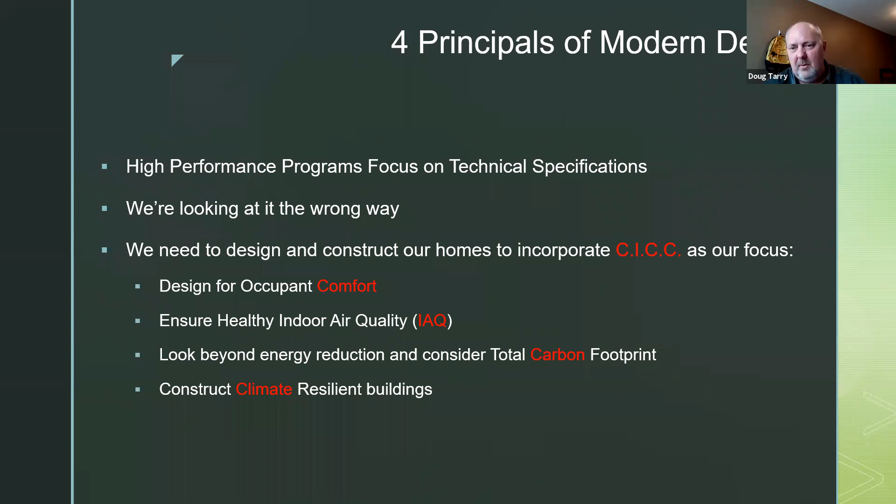So what is net zero and why should we care? This is assuming you know nothing about net zero. In simple terms, a net zero home creates as much energy as it uses over the course of the year.

Why should we care? Well, frankly, we've only got one planet. Earth is our one and only home. Our shared role should be in ensuring that it's safe and livable for our children's children. So my grandbaby and beyond.

And I'm a huge fan of Joe Strummer. I would have to say he once said in a song, hey, I hear what you're saying. If you're going after getting the honey, then don't go killing all the bees. And that's what we've got to try and avoid doing. We have to make sure that we're thinking long-term on this.

So in building our team for coming to net zero and what we're needing to do, you really got three core teams you need to look at. You've got your consultation team, and there you need an experienced energy advisor to lead you down the path and make sure that you're going in the right direction. You need to supplement that with a solar consultant, an HVAC designer, an installer, your window supplier, your building official, and your utility guy to make sure that you're able to cover this off.

The next team is your construction team, and you've got to engage your site supers early and frequently, as often as you can. They have to know what's expected performance-wise in the field, and they have to be able to troubleshoot. So it's really important that they understand what the goals of the program are. You also need to look at any trade that touches the envelope. They have to be included because they can wreck your day in a real hurry if they don't know.

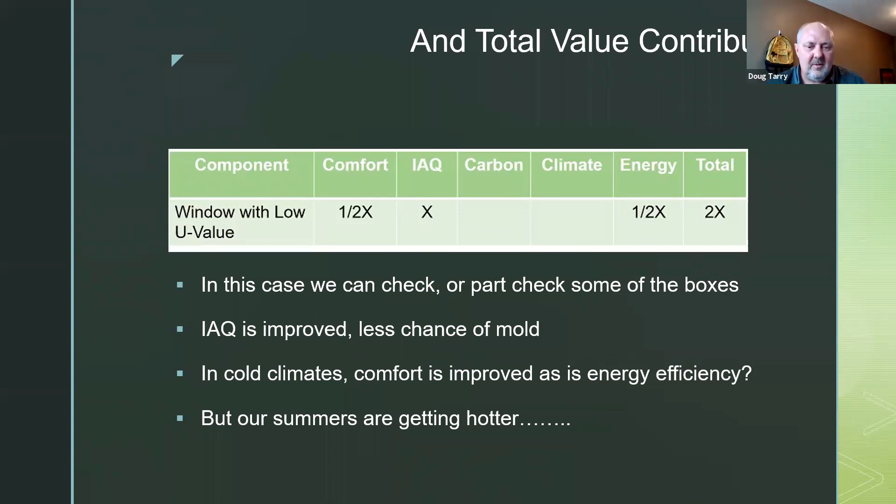And it's a little bit of an improvement on the energy piece as well, but it doesn't address summertime heat gain. So when we're looking at windows, we want to talk about low solar heat gain coefficient. My recommendation to any builder, pretty much anywhere that has sun, is get it under 0.3. Now, solar heat gain coefficient should be very available in the States.

In Canada, it took us quite a while to get that, but it's very much worth looking at. I've met with builders in the States as well that don't consider this, and they're going for the best wall that they can build, as opposed to the best wall system that they can build. The windows are an important part of that, and we'll get into that in one of the future sessions.

The challenge with not dealing with low solar glass is that you're going to blow up your energy loads on the cooling side. So if we're able to add low solar glass, it's going to reduce our AC sizing, which makes your ducts smaller. That's really important, especially if you're still putting them up in the attic. If your HVAC contractor doesn't understand the relationship between low solar glass and being able to put in smaller systems, the first thing you do is retrain your HVAC contractor. And if that doesn't work, find a different HVAC contractor.

It's that important. People will say, well, why would I spend more money on the windows? Here's the thing: let's say a $10,000 window package on a fairly small home costs you an extra $1,000 to go low solar glass. So it's going to add about 10 cents more per dollar, or 10% more. Will a customer pay $1,000 more on a $500,000 home? Well, they probably would if you explain it to them. But if you build it into the total value contribution of the home and it's not included as an extra, then after the fact it's, I just got this really great deal and oh my goodness, my home is really comfortable, which is kind of the goal.

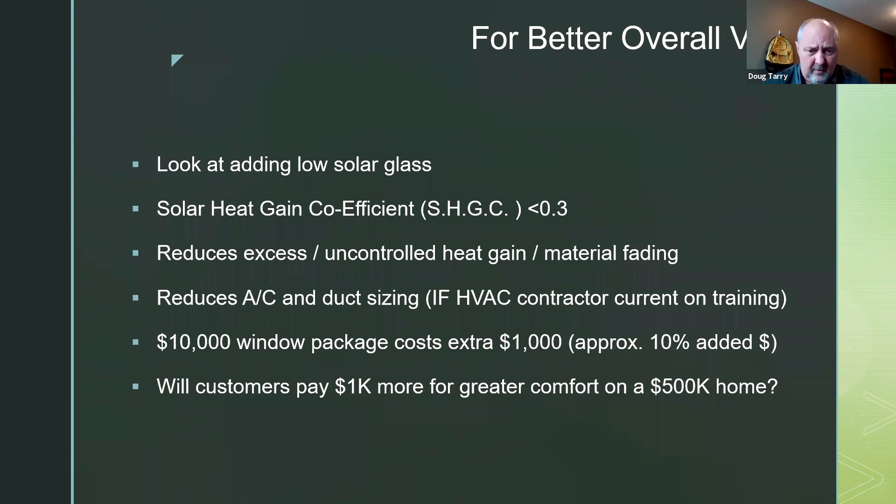So now we look at a comparison of going from regular triple glass to adding low solar glass. Now we've got greater comfort both seasons. We've improved indoor air quality year round because you get rid of that heat stuffiness that can happen in the summertime. We've improved our climate resiliency, and we've improved our carbon reduction because we're hammering away at reducing the heat gain that we can't control in the summertime, the intermittent load that's hitting right at the time that peak loading for your electrical grid is happening. And energy consumption is reduced as well. So we're able to do a lot of things for $1,000 more. That's why, in my mind, that's a better overall value contribution than just looking at less expensive glass.

What that doesn't factor in though, is that you're also going to save money on your air conditioning and your duct sizing, because your air conditioner can drop in size and your ducts get smaller. So you're using less materials. That's also another way of reducing your carbon footprint on this as well. So it's a win all the way around, and your customers really enjoy it.

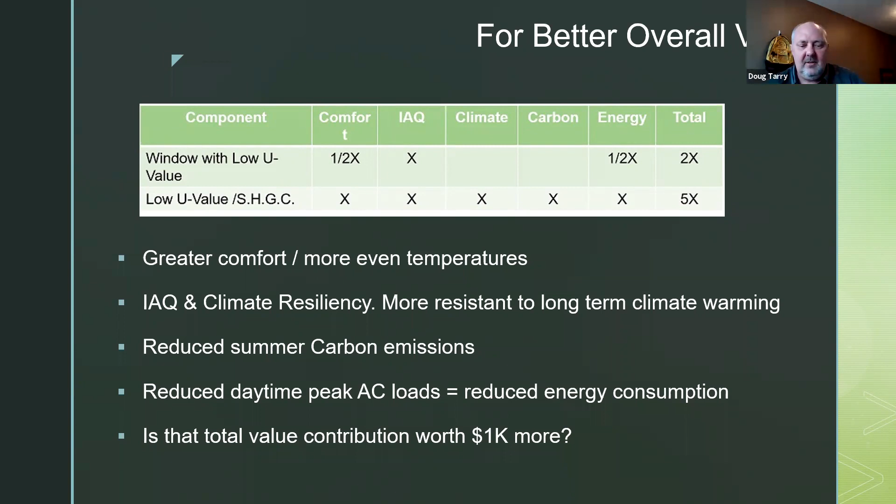The best way I've found for demonstrating this is get a nice sunny afternoon with the window glass right there, and have the customer put their hand right on the glass and say, "Isn't that cool that your glass is cool?" And they're just floored by that. Of course, they want to tell all their friends about it as well.

So the first couple pieces, Doug, quick question on that one: do you omit the low solar heat gain coefficient glass on the north side of the homes, since they may or may not be impacted, or do you do it across the whole package? I'm not that mean to my framers.

I do it across the board above grade, because we used to do spectrally selective glass. And the problem with that, Aaron, is then you've got to try and figure out, okay, which window is this 4x4 window, which wall is it supposed to go in? And it just makes it really difficult.

Now, where I am, I'm around 41.5, 42 latitude. When we're in July, August, the sun's actually a little bit north of us for a while, so there's still a benefit to putting it on the north side as well. And Gord Cooke would tell you too, it actually helps reduce radiant loss outward, so it helps keep the energy within the home. Great point, there's benefits all the way around.

The only spot where we don't do it is when we've got an exposed basement, where we think, okay, we might gain a little bit of heat warming into the basement. But I can see at some point down the road that we'll just do it on those windows as well. It's just less available right now for certain basement windows, but above grade, I would not try and separate it out. Yeah, perfect, thank you. The difference in cost, it's not worth it.

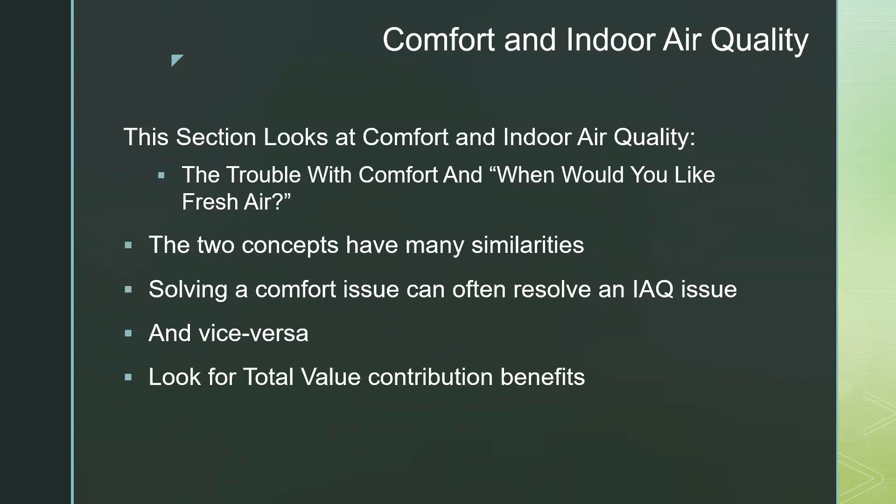All right, so here we're going to look at comfort and indoor air quality. And one thing I always like to talk about is the trouble with comfort is getting people to understand, when would you like to have fresh air? But those two concepts, they're similar, they overlap a lot, and sometimes solving a comfort issue can often resolve an indoor air quality issue, and vice versa. And again, we want to try and see that we're hitting total value contribution benefits.

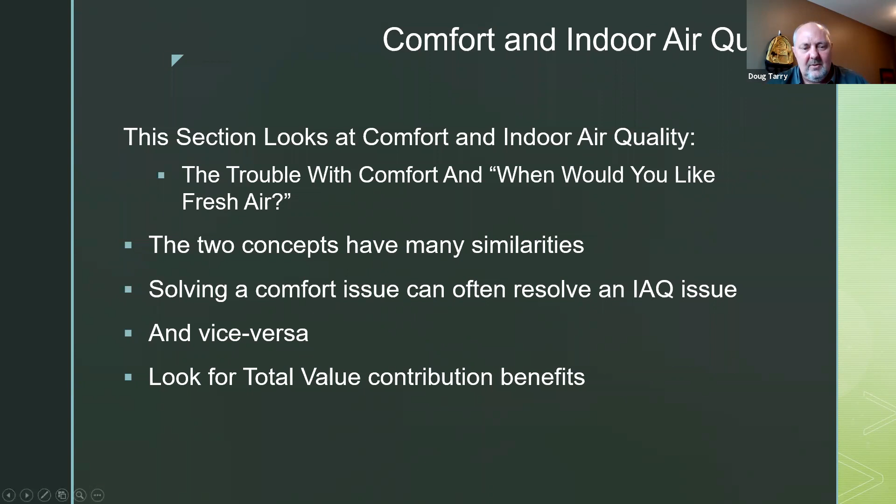But I like to talk about Goldilocks.

Now, Aaron, I don't mean it in the sense, I think she was on to something, but I don't mean the fact that she was a break-in and enter hooligan that had no regard for other people's property. Because when you think about it, really, Goldilocks wasn't a very nice person. And you kind of got to feel a little bit bad for Baby Bear, right? He had his home invaded, his breakfast eaten, his chair destroyed, and he found someone in his bed who then ran away on him right when he was wanting to play with her, right? So he thought, well, the one good thing I'm going to get out of this is at least I got somebody to play with, and she runs away. So clearly she had some serious entitlement issues. That's not what I'm talking about here today, but it's a pretty great story.

Right? What I'm talking about is the just right principle, or the middle path in decision making, which is actually known as the Goldilocks principle because of this. And so how do we as builders ever attempt to handle the question of occupant comfort when it's such a subjective feel to the occupant, right? And the answer is make Goldilocks happy. You want to hit for the middle, right? So that's what we want to try and do.

As far as comfort, in my personal experience, and part of the point of the guide is to share my horror stories and everything I've screwed up, I think I probably made almost every mistake possible on comfort. I do understand that clients' expectations rise with high performance homes. They expect more, right? It can kind of feel like a forlorn hope, where you feel like you're constantly chasing. You can't get the perfection, and you don't really even understand what perfection is.

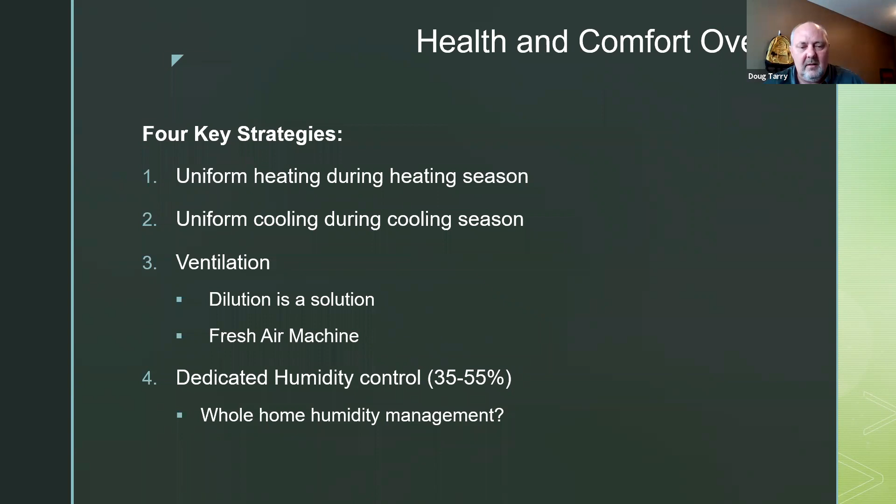Okay, so what is low-hanging fruit? Well, number 1 is rooms with a draft are a drag. We know that they're not comfortable to be in, especially in the wintertime. Rooms that have excess solar gain, that overheat and are not comfortable to be in. So, you've bought your house on the lake and you've got this great bank of windows facing the lake and it's facing west, and you can't be in those rooms because you're blown away by the amount of heat. That's probably not really prudent for comfort, right?

That cold basement floor, it's amazing because a lot of folks say, well, you've got to go with in-floor heating to fix that. And, really, about an R10 of foam underneath that floor and allowing the concrete to be thermal mass within the home will take you about 95% of the way there. And I've constantly got customers saying to us, wow, I can't believe how comfortable my basement is. And it doesn't have in-floor heating, which is the Cadillac. I've got it in my own home, but we don't build with that as a standard.

The other thing is thermostat location actually becomes extremely important. We really want to avoid letting the decor consultant put their hands on it whatsoever. So, if it's got to be in a certain spot to really make sure that the home works well, don't let them move it so they can put a picture there sometime in the future. It's not really fair to the customer in the long run. So we want to control air leakage, especially where people sit.

We can look at zoning as an option, but I've found that if you start with looking at low solar heat gain windows, zoning becomes less of an issue because you have less of a challenge with that. But that also assumes that you're looking at mechanical systems that are modulating, right? Single stage systems. When I actually got ECM motors put into the Ontario building code for mechanical systems, I neglected to clarify that it should be modulating. So then they brought in single stage ECM motors, or direct current, you could say, which doesn't really help with what we're trying to do, which is reduce stratification by having blended air on a continuous basis.

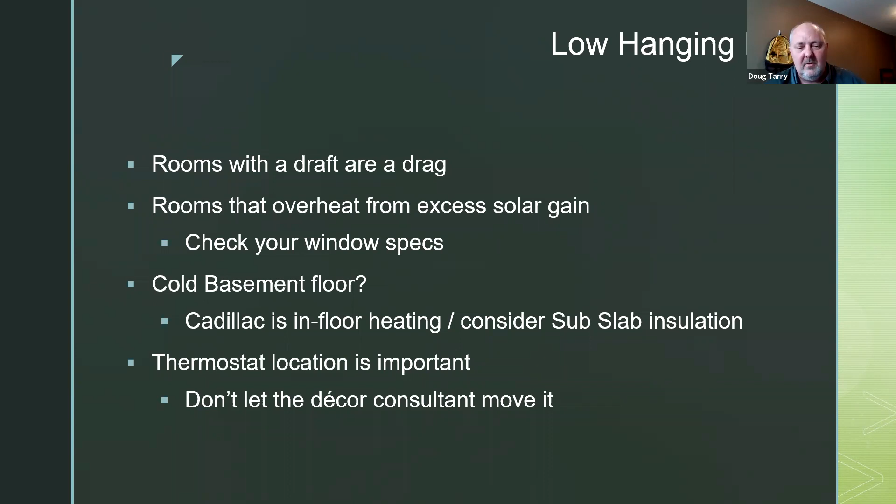We also know that a well-insulated basement, properly designed, with low air leakage, insulation under the floor, can really be one of the most comfortable rooms in the house. So the stigma of the cold, stinky basement doesn't have to be that way.

So the thermostat location, I'm chagrined, as it were, to say that this is actually from my own house. And over here on the picture on the left-hand side of the door, that's where my thermostat is. Now, the challenge with that is that when they did this design and install, there's a heated tile floor directly beneath that. So in the wintertime, that thermostat's satisfied almost all day long. In the extremities of the house, it makes it a lot more difficult. So in order to resolve that, we've actually had to turn down our tiled floor heating in order for the rest of the home to be balanced.

So that's a consequence of not having it where the clock was, right? It would have been a lot easier to just put it where the clock was, and we'd have had better comfort. If you have this as a situation, as I've just alluded to, balancing the home's temperature can be extremely difficult to achieve. And that's where you start to get into the stratification.

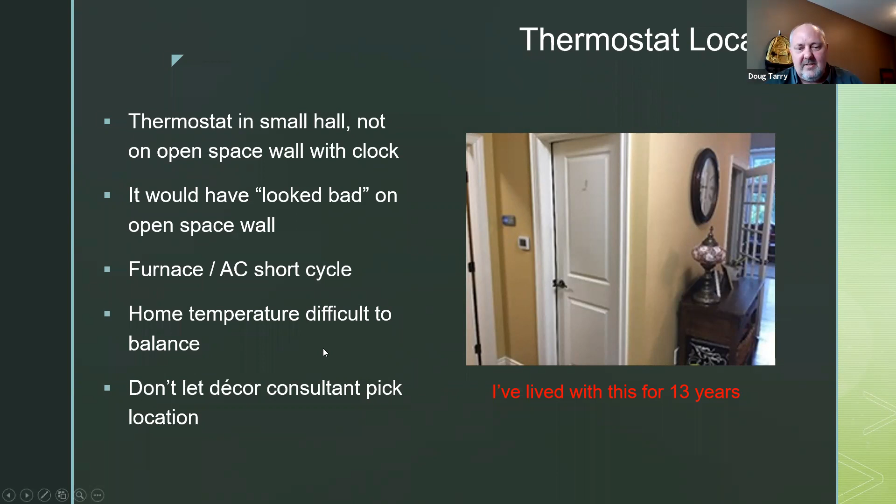And stratification doesn't have to happen necessarily top to bottom within the home. It can happen outside the center as well, where the center of the home is nice and toasty, but the extremities just don't get enough air on a regularized basis, and they tend to be cooler or less comfortable. Or if there's excess windows, it can be hotter as well. So as I say, don't let the decor consultant dictate where the thermostat goes.

Right sizing of mechanical systems is incredibly important. Right sizing actually matters. I've been in this long enough now that I remember when the mechanical contractor was going to size up the furnace system or the air conditioner for the home, he'd put his tongue on his thumb to get it wet, stand out in front of the house, and back up until he'd lined up the house. "Oh, well, that's 2.5 tons, that size right there." And that's how they would size furnaces. I'm not even kidding. I wish I was.

And unfortunately, when you do that, you're going to oversize the systems. And even following proper sizing procedures, you have to understand that if you size it exactly according to the procedures, there is an overshoot built in. So there's a fudge factor already built in. So if you oversize above what's there, then you're getting far, far too big.

But you know what happens when you put an oversized AC or a furnace into your home? That's when you get into that I'm hot, I'm cold dance, right? I'm hot, I'm cold, because the temperature stratification is happening, because you get into an oscillation cycle. The temperature is going up, it's going down, it's going up, it's going down.

And so we had that with one home that we were doing years ago, and we couldn't figure out why we couldn't make the home comfortable. What we found out is that the furnace in the house was about 2.5 times oversized for what it should have been. So we couldn't get the home to balance. The temperature at the thermostat was satisfied long before the extremities were heated. And so ultimately what we found is the only way to resolve that is by right sizing the mechanical system.

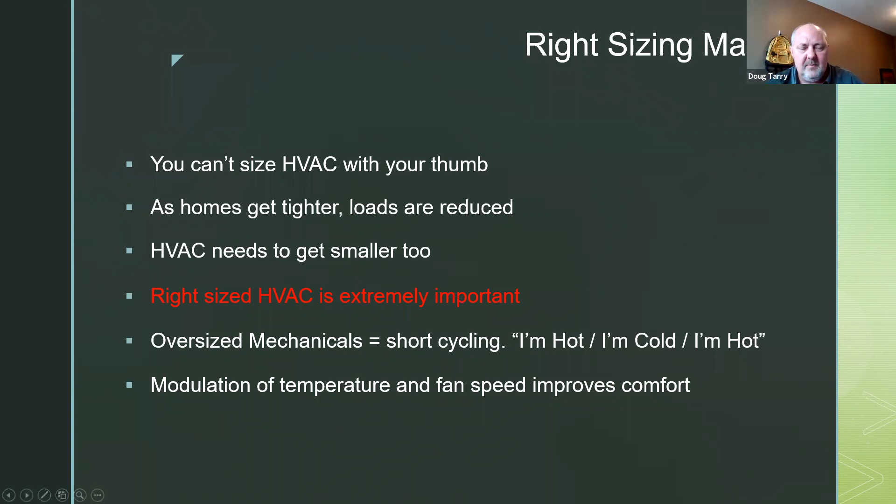So supply air distribution. Supply side duct design installations. Here's a couple of examples. Oversized ducts were that way because they were designed for the air conditioning load. So it then needs a larger fan and ducts than for the heating season. And this is going to result in extra drafting. Now you can help resolve this a long way just by simply, as I said, looking at low solar gain glass for your windows. The other one is location of supply grills. So try and avoid locating the supply grills so they're blowing air over top of people's heads.

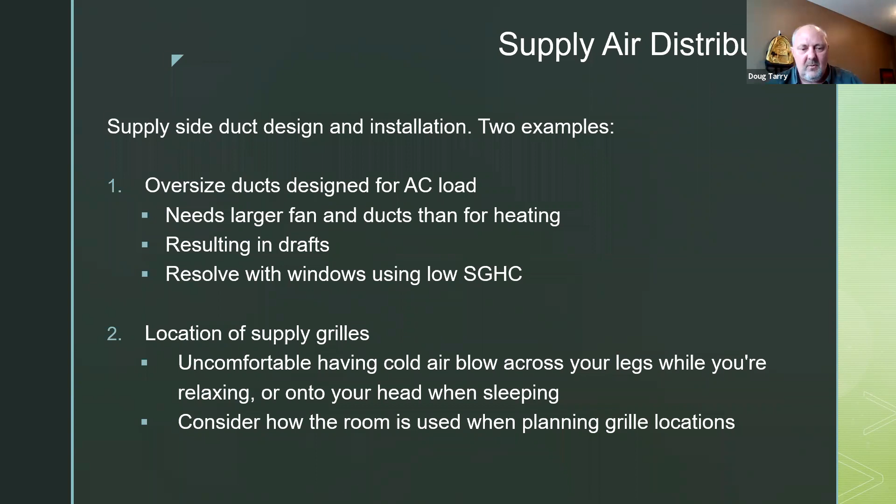And I'm really a fan of interior wall high throw, and we'll get into that a little bit later in the next session, as opposed to floor installed systems, or specifically ceiling installed systems if you're in the south, because those just don't blend the air as well as when you have an interior wall, high wall throw across the room. What we've seen from our studies is that it really blends out the air much better. Heating or cooling season, it doesn't matter, it just works better. So we also want to consider how the room is going to be used when we plan our grill locations. Try and avoid blowing air across people's heads, or where people's legs are going to be bare sitting on a couch, that sort of thing.

So the room over the garage. This is where a holistic approach really pays off. You find that it can be too hot in the summer. It's going to be too cold in the winter. Part of how we have to deal with that is we have to reduce the duct leakage and the room leakage. You want to improve the insulation, especially underneath the floor. Again, I'm beating a drum here with the low solar gain windows. And then you also want to confirm that the airflow meets the HVAC design.

So this is taking a tepid step into system commissioning, which is, I believe, ultimately where our industry needs to go. Now, we do periodic spot testing to see that our systems are working, but we are bringing somebody on staff that's going to be doing more ongoing commissioning, in part because in the last few weeks, we just started our own mechanical company. So we're taking that in-house.

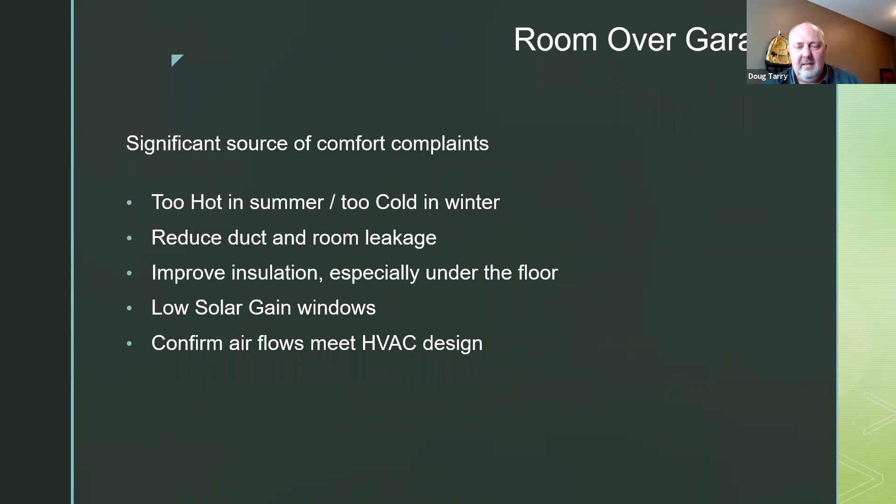But you know what? Good duct design specific to the room's load, better windows, very low air leakage, and insulate the heck out of the floor, and you've got a fighting chance of having a comfortable room above the garage. So overall, in all rooms, remove drafts, knock off the heat gain, make sure you've got the airflow you're supposed to, and then make the toes warm, and you're done. You've got a really good assembly there.

Okay, we are up on a couple of questions here, Aaron. So what do you think? Do you want to have at these?

The first one for the folks here is, do you think your home is comfortable? And are we doing both questions at the same time? Yeah, I think you'll just answer question 2. It looks like some people pre-answered it, so this is great. Okay, I'm not sure why the questions all showed up at once, but it looks like people have answered them. Okay, great.

So do you think your own home is comfortable? Yes. Okay, and depends on the time of year. Yeah, so about 33% said depends on the time of year, and that's pretty good. That's about what we've seen in other times we've done this program, is that folks have kind of a mixed feeling about how their home is. They might think it's really great in the summer, but then not so great in the winter, right?

So the other question then is, do you have rooms in your home that are too hot or too cold or uncomfortable? Yeah, that was 100% yes, Doug. So, and this is why it's always funny to lead with the first question first, is because we ask if your home's comfortable, and then we ask if there's specific rooms that are not comfortable. And it's almost always 90 to 100% yes, that they've got rooms. So we've got some work to do as an industry, don't you think? I would say. Yeah, all right.

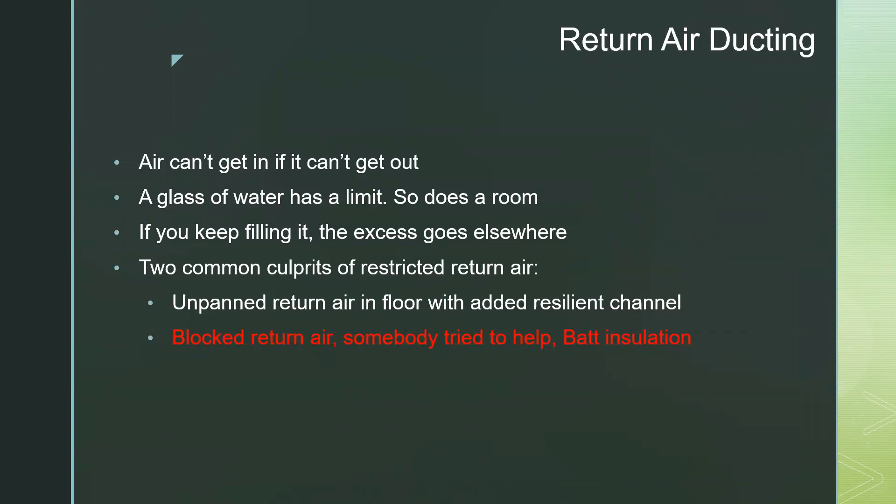So moving on, return air ducting. It's also extremely important. And basically, I like to think of this with your return air, when you have a glass of water, right? This is an analogy I like to use for teaching clients. You can only put so much water in the glass, and then it's got no place else to go, and it starts to spill out. And so I try and teach the customers that a room's kind of similar to that. So that room over the garage, if you've screwed up on your return air and you're trying to pump warm air in there in the wintertime, it's only going to take so much in, because then it just doesn't have the ability to recirculate the air back out.

So what we tend to do is we want to make sure that that return air is working really well, and then we follow those other principles that I discussed.

Typically, it's going to come down to one of two things. Somebody's put in an unpanned return air using a joist, and then decided that they've not properly connected it, or somebody's added a J channel for resiliency, so you get smoother drywall. Or the other one is somebody's decided that they're going to block the return air during construction to keep the dirt and debris out of it, and then forgot to take the insulation back out. We've had that happen a couple of times, and it's just so embarrassing when you're going into the client's house later on and you're ripping a wall apart or taking the grill assembly apart to get at that insulation there. And it's like, well, we were just trying to solve a problem for you. You look like you're kind of simple, you know what I'm saying?

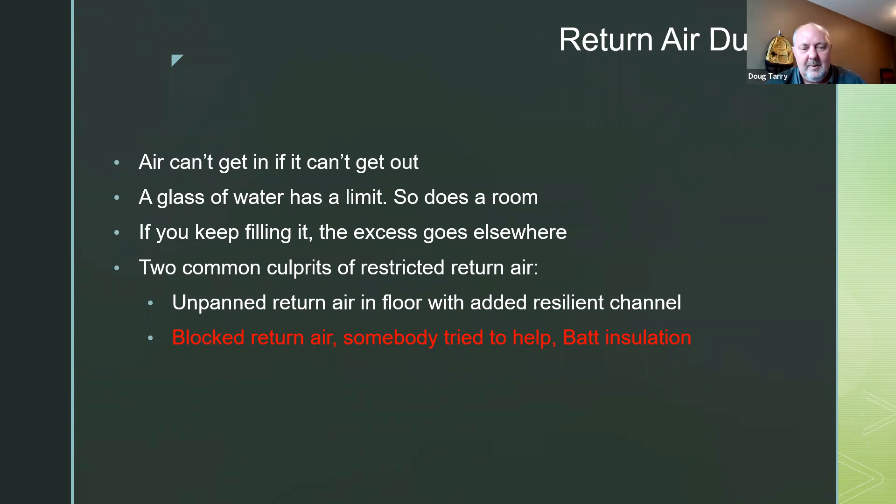So this is again back to being able to do duct testing. Now, there's this product called a duct blaster, and you can use that for doing some testing, or even a balometer, which is fairly cheap and inexpensive now, but you can use it to measure airflow and see if you've got a blockage. We've done that a number of times to resolve problems. Always better to do that before the client's in the home, though. But if you've got a problem with the comfort in a home and you think you followed everything else, that's where I usually go with my first go-to move is check the return air. And a lot of times that's what it is, right?

So how do you check performance? Well, we start with a visual inspection. Ultimately, I think we're going to go to full commissioning. It's a lot less costly to do that up front than doing a warranty repair, especially with the client looking over your shoulder.

Now, I'm not talking about air conditioning today, but I might be the only builder around that's actually fixed an air conditioner for a client on a summer long weekend when there was no AC guys available. I had the dad, and it was an Italian family. The dad was standing beside me, about 35 degrees Celsius, so about 95 in the home, and 100% humidity. The mom's sitting behind me, the dad's beside me, and the daughter standing glaring at me, watching everything I'm doing. I said, this might be easier, since it's my first time, if you just let me do this without you watching. No, we're really interested in what you're doing, they said. Well, I got it done, but it was ugly and it was painful.

So commissioning and making sure things are working properly is a lot less painful than, as a builder, having to try and figure something out on the fly.

So Doug, are you always doing duct blaster testing? No, we do random testing. But as I mentioned, we are looking - we just in the last 4 weeks started our own HVAC company, basically out of necessity. So we're looking at doing an extended 5-year warranty over the next little while, and part of that is to get in and check the filters annually, check the humidity levels. But part of it as well is going to be commissioning the systems. We're moving to full commissioning probably within a year.

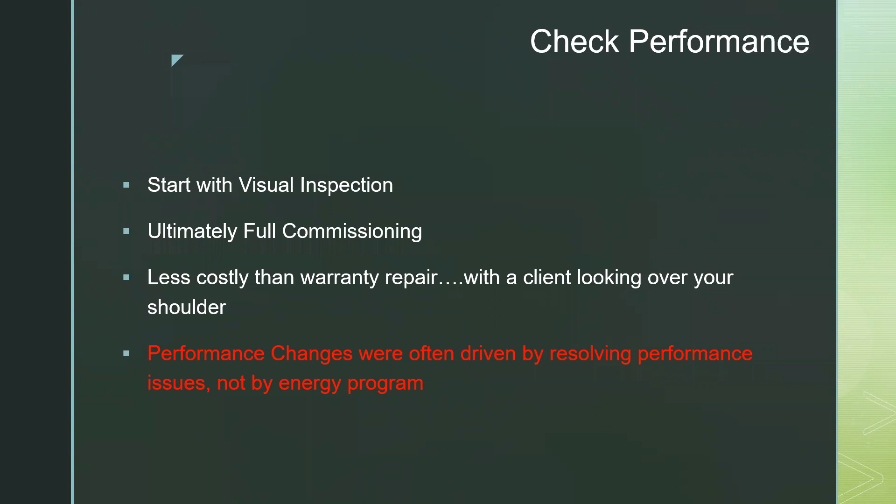Great. Yeah, it's an added expense, but you know what, it's a nice insurance policy, right? It's really not that much more money compared to having to go in and rip it out with the client, with them being very upset because things aren't working.

What I find most interesting about this list of different problems I've gone through is that none of the changes I described were a direct result of following any energy program requirement I've ever been involved with. In every one of these cases, it was fixing a comfort complaint that a client had, and then applying that knowledge to improve the construction of the home.

Because I like to engineer stuff out of the home - I hate that phone call, right? It's so painful because it's never at 9 o'clock on a Tuesday morning with lots of time and staff available. It's always the worst possible time, and it makes you look so bad.

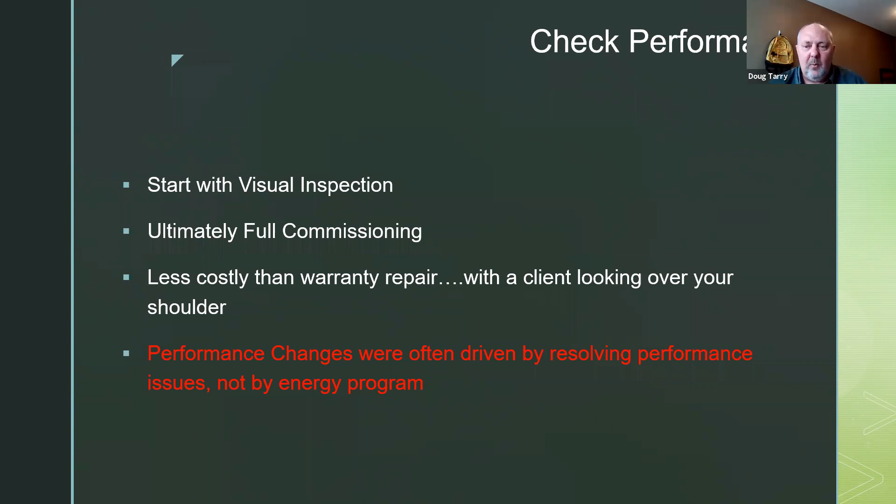So we've done most of these changes to engineer these problems out of the home. Ironically, it just happened that these steps also help improve the overall energy performance of the house.

Okay, so indoor air quality. You guys in the States have this really cool program, Indoor Air Plus, from the EPA. In 2019, back at the EEBA conference in Denver, Gene Myers from Thrive gave me a tour of some of his homes. I was really thrilled to attend an IAQ seminar at his one model, I think it was on the last day, and we were able to test some IAQ measurement devices. For me it was a real eye opener, because I love cooking with natural gas, but having that IAQ monitor with the gas stove really showed me why it's not a good idea.

So up here in Canada, we don't have an indoor air quality program. We're trying to negotiate to bring Indoor Air Plus up to Canada. And here's a shout out to you guys at EEBA for being such a great source of information to help with indoor air quality programs. I really believe Canada's got to catch up - we need a program, even if it's at a pilot level, because it's a real challenge when you have to beat the path in the snow by yourself, right?

But here's a question I ask all my clients: when would you like fresh air? It's incredible the number of people who say, well, in the summertime, or at night, or I like it when I'm sleeping, or in the wintertime, right? And I'd coax them until I got them to what I consider the right answer, which is all the time. When would you like fresh air? All the time.

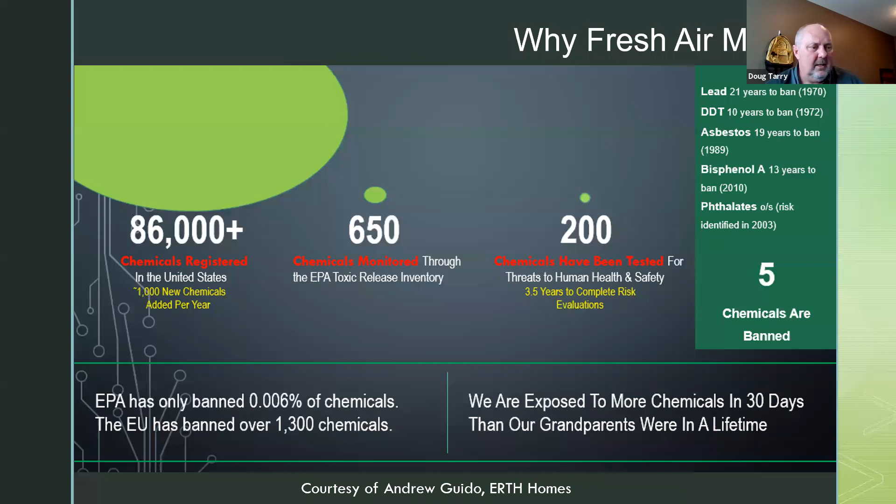We're poisoning ourselves and we don't even know it. It's just that constant drip of slow exposure, kind of like putting the frog in the pot and turning it on and letting the water come to the boil. And that's what's happening to us, folks. It's pretty critical. So there is some hope.

One is putting in a fresh air machine. Now, I'm not sure if everybody understands the difference between an HRV and an ERV, but HRVs are not ERVs. All ERVs are a form of HRV. HRV is a heat recovery ventilator, so it exchanges and recovers heat energy. An ERV does heat and moisture, so latent and sensible.

Why I like ERVs, especially in my climate, is that—I was told for years you can't use an ERV in a cold climate. And then I found the vanEE that does in fact do that. We find there's less overdrying in winter, which was critically important to us. We actually had times where using an HRV, we would get the humidity down to like 10% levels, and we're trying to blast moisture into the home all along. And then also less overwetting in the summer. So we think that that's an important piece as well.

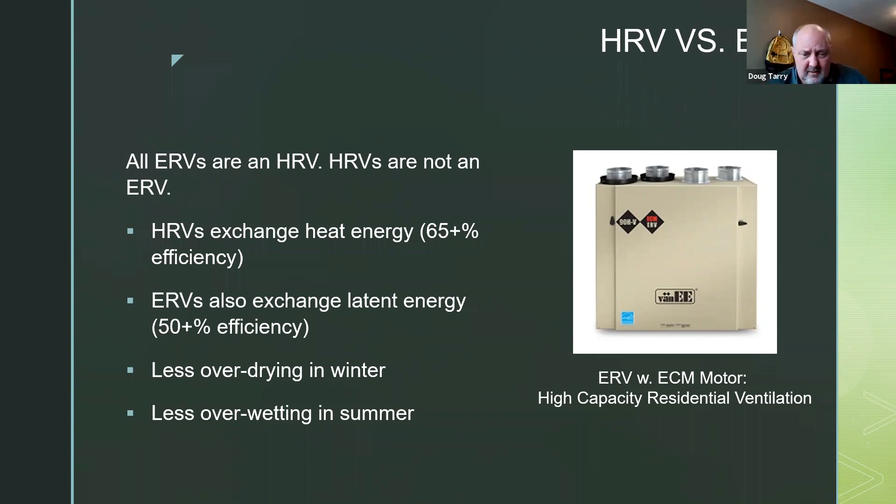I love having an ERV with an ECM motor though. It helps to provide additional ventilation capacity. Now we've moved up to the 90H, and part of that is because we are finding that there's more occupants in the home, and certainly there for a longer duration. So we have to give them fresh air over a longer period.

And then we look at dedicated dehumidification. Doug, can you just add for everybody what ASHRAE climate zone you're in? Are you in 5? Yeah, I think I'm in 5. So I'm right around near Detroit, Michigan, and Cleveland, Ohio. I'm just a little bit north of that. No, I think Detroit to Buffalo.

Yeah, and I think that's a key point—the old rationale would have been, oh no, climate zone 5 and above, you always have an HRV. And what you found over the years is the ERV has really been the answer for your builds.

Well, far better. In fact, one of the key reasons for that is because what we found is we'd have HVAC contractors dealing with humidity complaints in the summertime. And they would say, well, turn your HRV off in the summer. Come again now? What? So you don't need to have fresh air in the summer? Okay, well imagine putting a big plastic bag over your head and saying, okay, you're allowed to put a straw in there in the winter, but in the summertime, you can't have a straw anymore.

Yeah, how does that make sense, right? And we found that all the time because it was dumping so much humidity into the home—that was their answer. And so we found by switching this—I mean, you still need to deal with dehumidification in the summertime, don't get me wrong, it's not a panacea, but it's a huge step in the right direction. It made a really big difference for us.

And so when you're looking at a northern climate where you've got humidity loads in these homes, that's one thing about net zero homes—they have a higher humidity expectation in them. There's going to be more moisture because they're tighter, higher performance. So you have to deal with it. And we found that the ERV is just a much better way to go. But for most of the clients I talk to, it's a fresh air machine that helps deal with moisture and heat, giving you fresh air all the time.

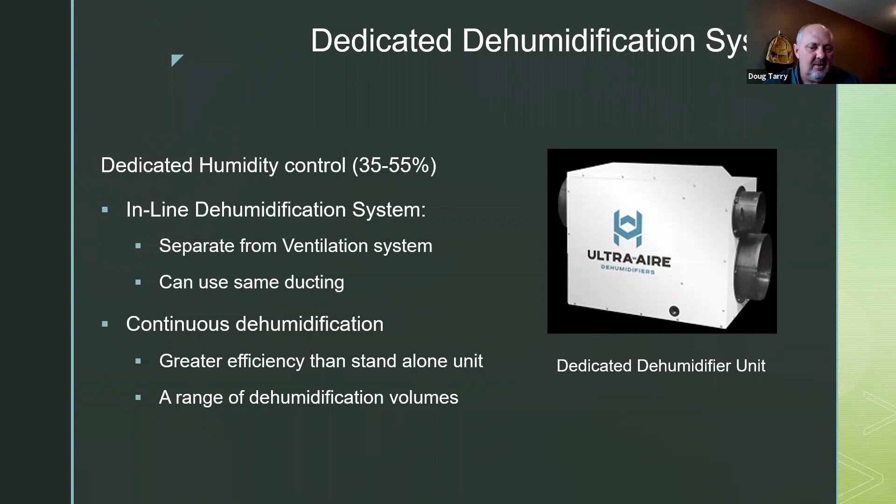I say set it at 50% humidity for summertime. You should be good spring, fall, and summer. It's something that's really changing, and it's part of our climate change issues that we're finding we have to deal with.

Okay, so off-gassing and VOCs, this is another really interesting one. EEBA's got this great program you've just come out with on asthma and allergens, so I won't tread too much on it since it's fantastic. For those viewing, it's the Healthier Homes Awareness for Building Professionals course on the EEBA Academy. It's excellent, really good stuff.

But when you look at things like that new car smell, or those fresh air plug-in thingies, that's actually volatile organic compound off-gassing. It is unhealthy for you, you should never put those in your home. If your home stinks, figure out what's making it stink and get rid of it.

That's right, like the garbage maybe. God bless the grandbaby, but he's still wearing a diaper, so we're not that green, we still have to deal with that. But sometimes he lets one go, and it's like, you got to get that out of the house.

You can put as many of those fresh air wick thingies in as you want, and it's still going to stink, but you're also poisoning yourself. So we want to be really careful about that. Unfortunately some people think zero VOCs must be bad, like if zero can't be good, why shouldn't I have some? No, you really don't want any.

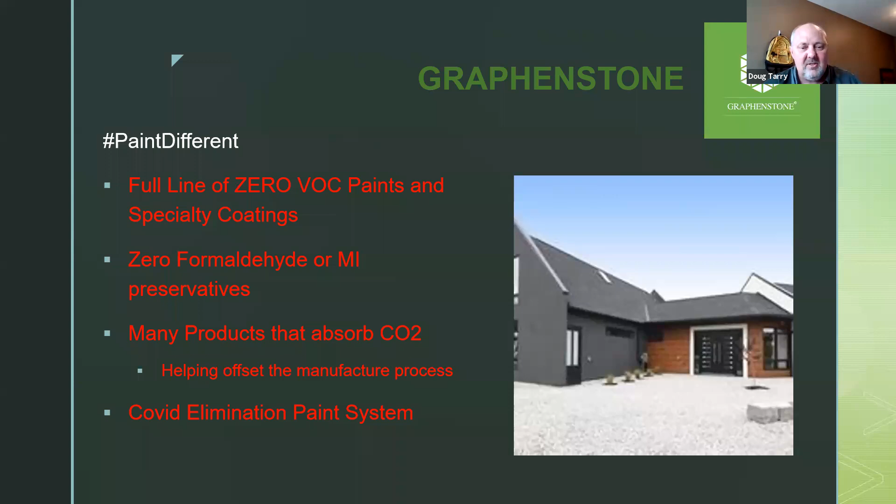But that's part of looking at whether we can reduce our indoor air quality issues by reducing the VOCs being brought into our homes. When we look at traditional VOC measures, which are under review now here in North America, you can have a zero VOC paint and it's still got formaldehyde and this other little nasty one called MI — short for Methylisothiazolinone. These are preservatives. In fact, MI was actually used in makeup and things like that as well.

But if you're allergic to it — it's not a toxin, they're both allergens — if you're allergic to it, it can make you deathly sick. And so we want to make sure that we're looking at those types of products. Again, I'll point back to the Healthy Home program as being a really great resource to consider.

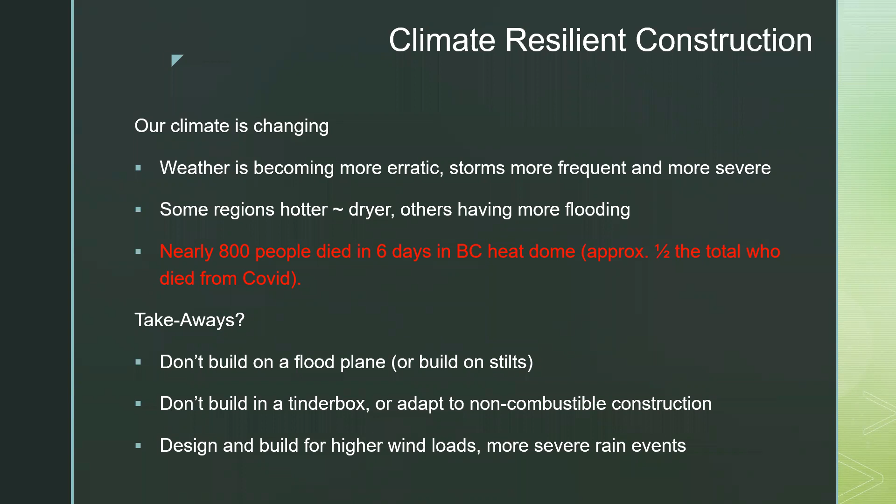But we also need to look at designing and building for high wind events and high rain events. In the past, we always thought about keeping the roof on the house by holding it up. Now we need to hold the roof down. And it's not just about rain coming down anymore. Now it's about rain coming up and in, especially on the leeward side of the rain event. So the storm's passing, and because of the severity, the rain is whipping around and getting sucked back in the house on the leeward side. So it's really changing our dynamic of how we manage these events.

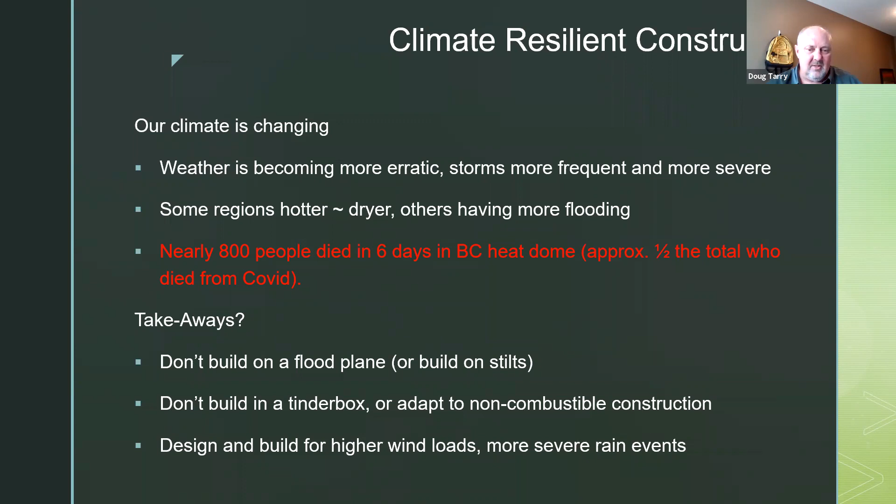So we've been working with Western University for several years now. It started with our work down in Puerto Rico. We learned a lot about climate resilient construction, rebuilding roofs after Hurricane Maria. And what we found for tornado management is that it's usually EF2 or less, and that's common in the States and Canada. So if you can design and construct your roof to hold on in an EF2 or less, you're going to solve 99% of the damage. If you lose some shingles, that's okay, you put them back on. But when you start to lose the roof in general, then you're really going to have a problem.

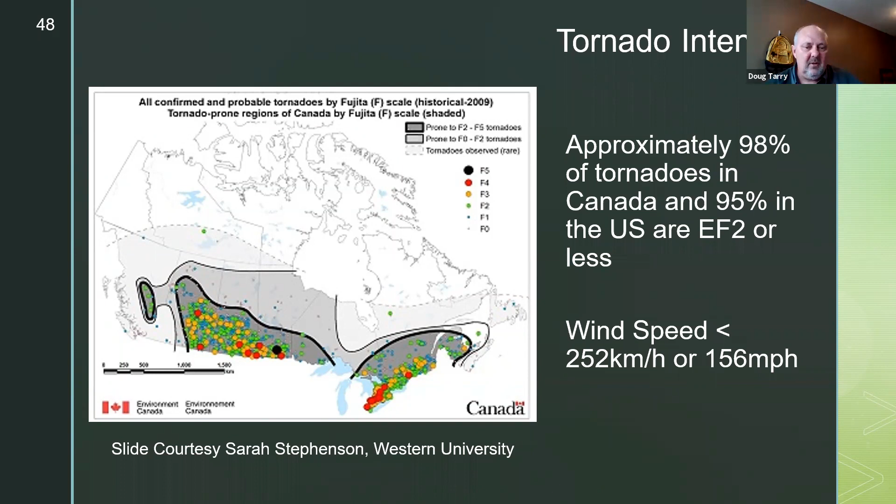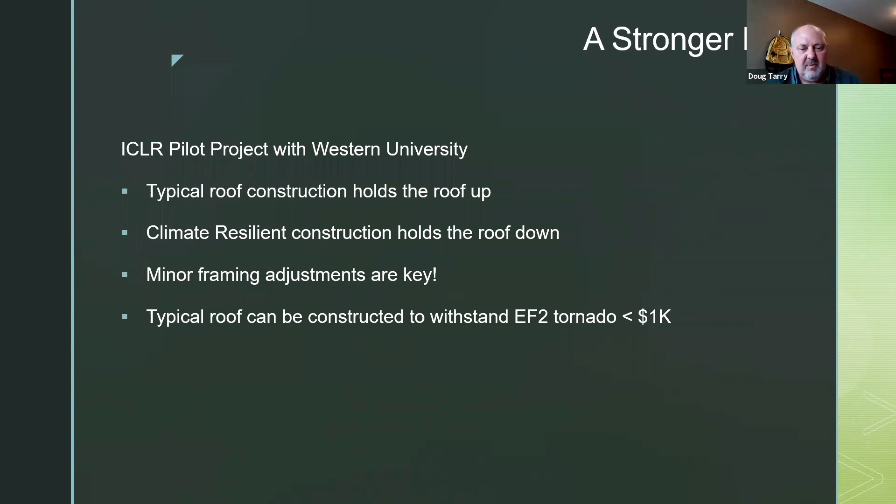And so we started a pilot with the Institute for Catastrophic Loss Reduction to build a stronger roof. As I said, typical roof construction is about holding the roof up, and they've put 3 toenails in to hold the truss in place until they get the sheathing on. And if you're lucky, the 3 toenails didn't crack the truss. With climate resilient construction, we're talking about holding the roof down. So we need something more robust, but we want to do it cost effectively and simply. So it's minor framing adjustments. There's really 3 of them, and a typical roof can be done much better for less than $1,000.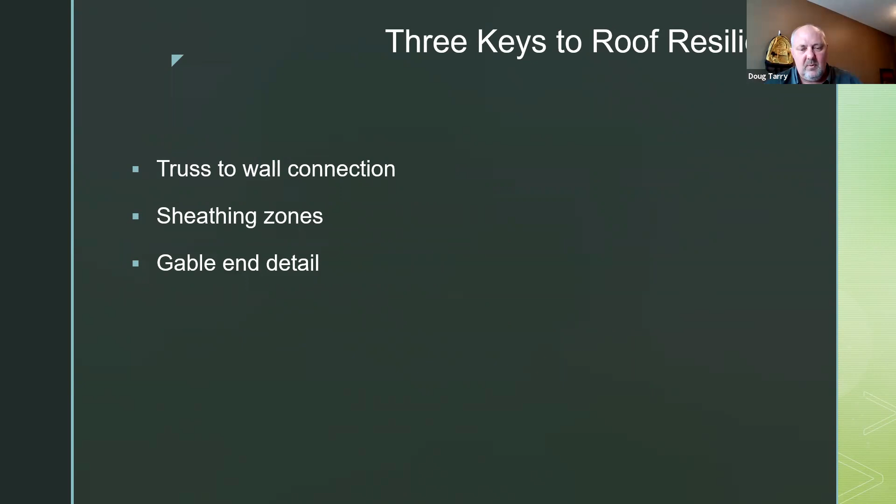So there's a couple of areas to look at. The first is the truss to wall connection. The second is what's called sheathing zones. And the third one is a gable end detail.

So we're going to go through those really quickly. When you look at a hurricane clip, you're talking about 10 nails going in, and it takes about a minute using a nail gun to properly install one of these, right? We've been having a lot of success working with a screw from Simpson Strong-Tie. I think MiTek has one as well, but it's about 8 seconds with the power screw gun, and you're looking at relatively the same cost between the hurricane clip and the screw, and relatively the same hold down.

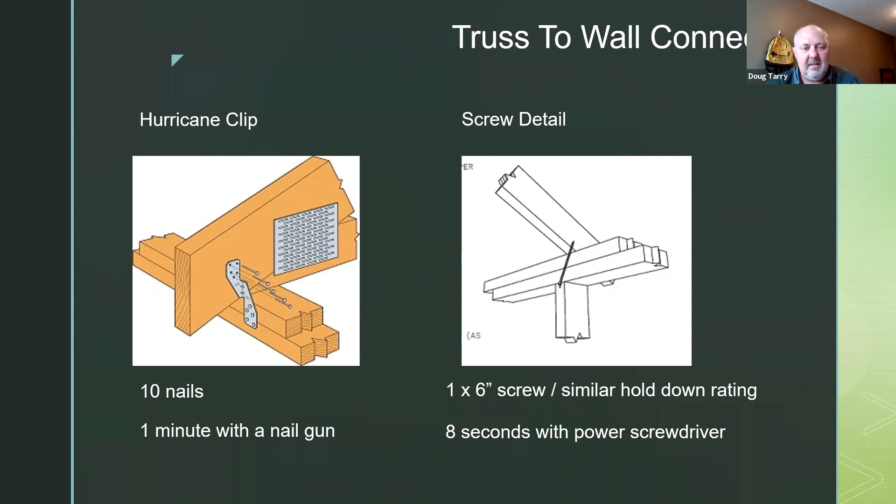So, besides the fact you want to hire framers that are around 6'5", which one do you think the framers would prefer to do? And that's where we got our costs down, because we got our time down on our labor. It was just a whole lot faster to put these in as opposed to the hurricane clips. Now, it's not universal. There are some cases where the loading says that you've got to put in a hurricane strip clip, or even a double clip, depending on what you're putting in, but it makes a huge difference. And it's roughly around 650 pounds of hold down.

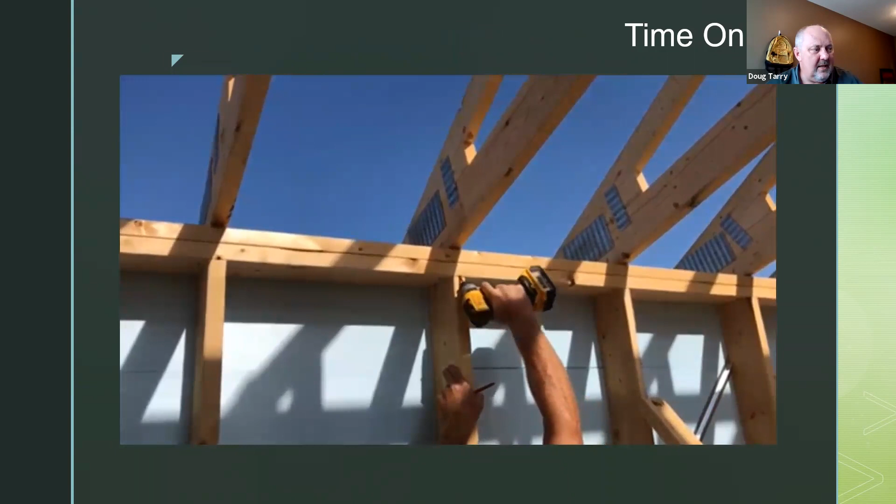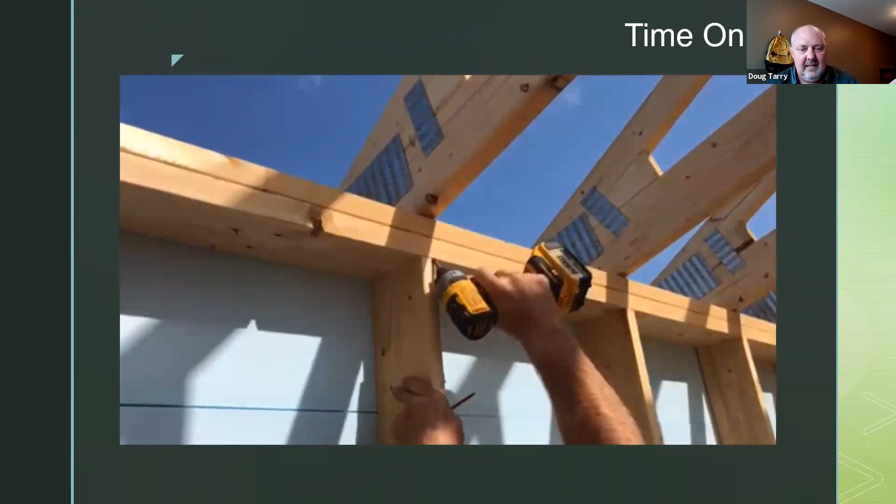So real quick video here. Sounds a little quiet, but that's showing how quickly they go in, right? Now, the building inspectors actually really like this as well, because that screw is orange, so you can't fake it. And they're very easy for them to go and look and see, okay, I'm seeing the orange screw head. And so it's quite quick for them to do an inspection to make sure that it's actually there. Our framers don't mind it. Our site guys doing their site inspections are able to see it as well. So it's a great solution. You've taken the climate resiliency down from several hours to about an hour per house, which is pretty cool.

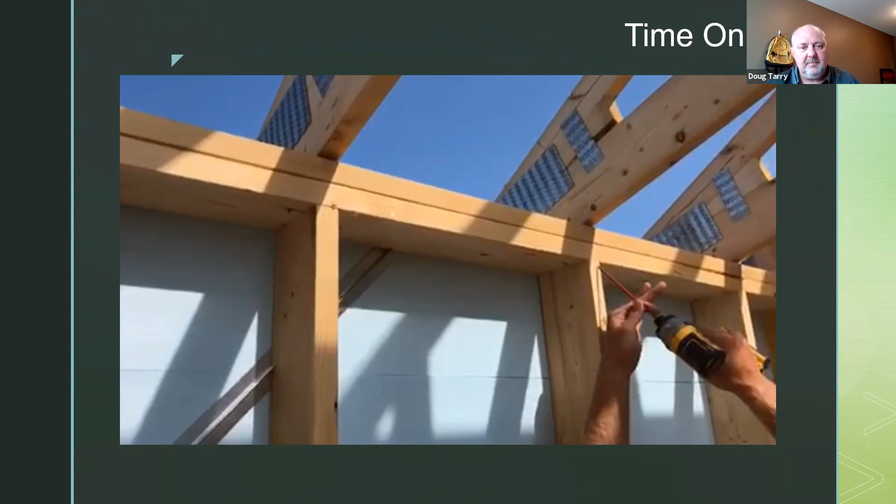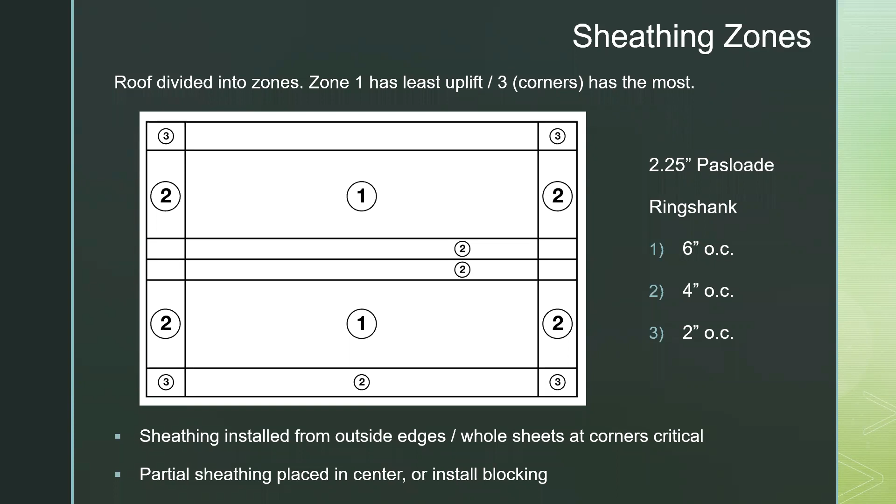The next one is the zones. And who is that, Doug? Who was that screw from? Is that a MiTek? I think MiTek has one as well, but we're using the Simpson Strong-Tie 6-inch hold down screw. Okay, so instead of the hurricane strapping older system, you go to this new screw system. Exactly. Yeah, that's great advice. And then are you using the hurricane clips on the plywood roof as well, on their sheathing? Yeah, up on the roof, the H clips to connect. Yes. I'm actually going to look at sheathing right now.

Oh, great. You want to actually increase the length of your nail. We're currently using, instead of a 2-inch, a 2¼ inch or 2.5 inch ring shank, or a 2¼ inch Paslode. And there's 3 core zones on a roof. Zone number 1 is the center core of the roof, and that's where the least amount of damage is ever going to happen. Zone 2 is your perimeter edges, so the overhangs, right? And so they need a little bit more attention. And then zone 3 is your bottom corners, and that's typically where you're going to run into problems.

A lot of that is because they'll put in little pieces of plywood sheathing, basically scabbing it into the corner. And what you actually really need to do is take the opposite approach: put in full pieces in the corners and along the perimeter. And then if you have to put a partial sheet running through the center, then you put it there. Now the alternative is you can put a partial sheet at the very top if you block it in place. So there is a way of improving framing speed by putting the partial sheet up to the top, but you've got to put blocking in to support it.

So in our mind, it's not just the clips, it's also supporting that partial sheet with a little bit of extra support, because it just doesn't have the overall structural load of nails. There's not enough nails in the truss to really hold it in place, right? So that's what we found as being really good.

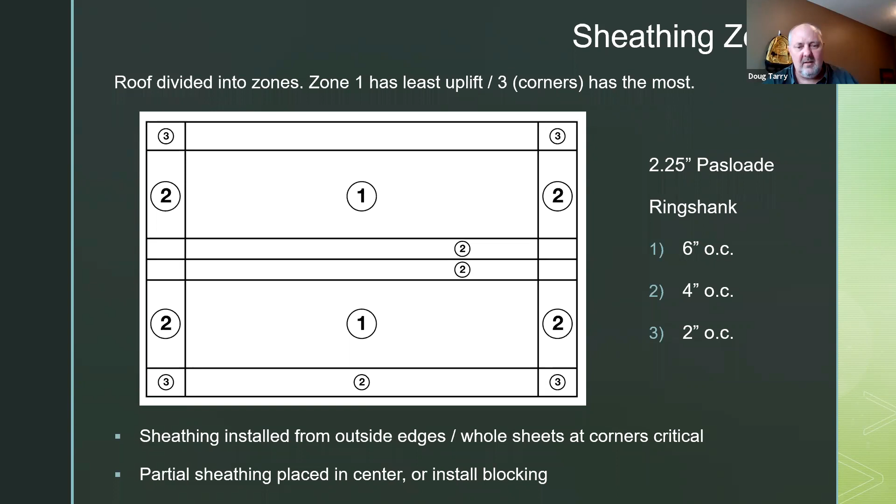Now you guys have got a program in the States called the Fortified Home Program. And we really relied on some of their detailing when we were working down in Puerto Rico. And we've done work with Western University and the Three Little Pigs lab research as part of how we've come up with this. So Dr. Greg Kopp and his team up here at Western have done a lot of work on this, and that's who we've been working with on this pilot project. The next one is where builders really tend to get in trouble.

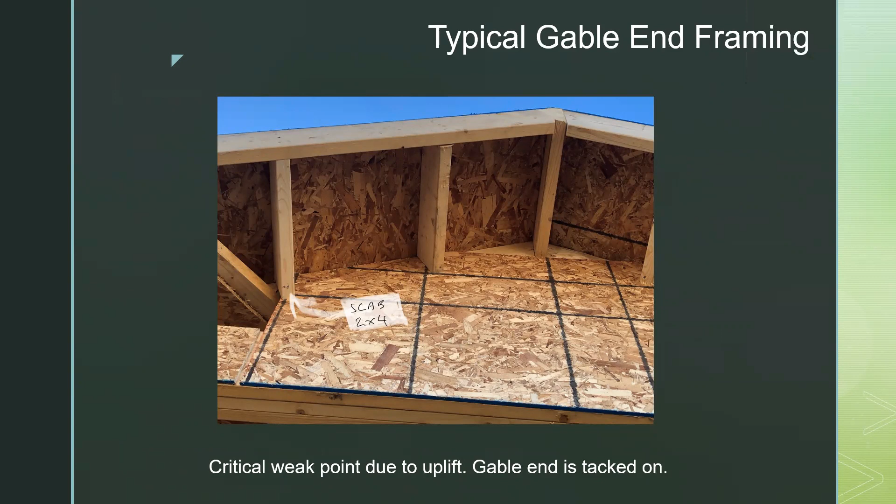And I'll admit to being guilty that we used to do it this way as well, is the framers would scab on the gable end detailing, right? Right. And so you can see the scab there, it's just toenailed in. Well, that sheathing is connected to the rest of the roof in one of the weakest parts of the roof, right? And so what can happen is once that scab goes, there's enough uplift that it can zipper the roof at the gable end. And once you lose your gable end, you're losing your roof. So we really looked at this in detail and decided that that just wasn't quite the right approach.

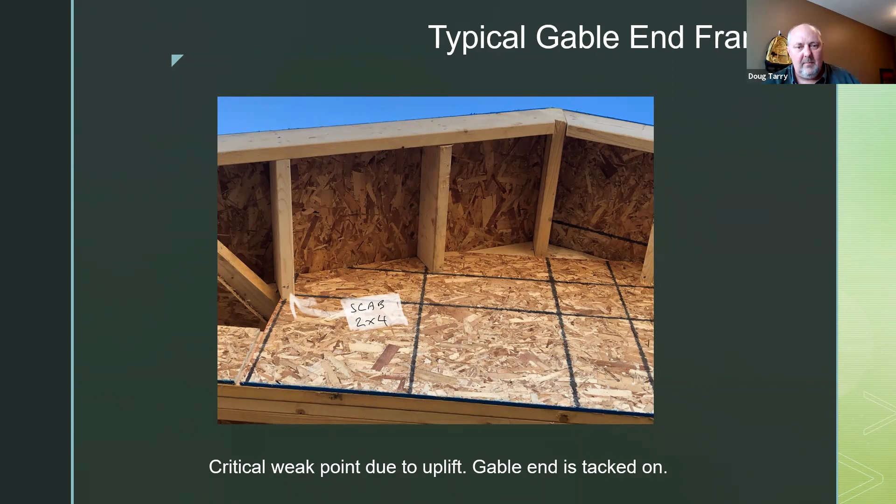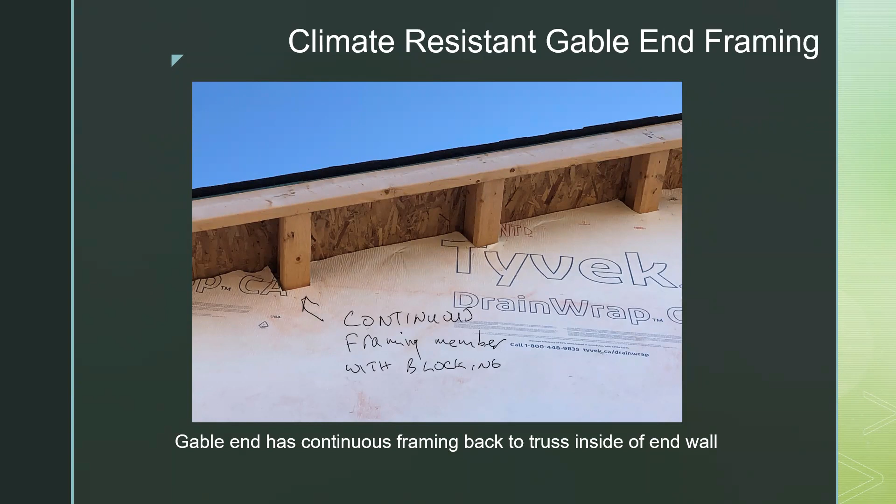Lord knows I'd never want to walk on it, Aaron, because with my weight, I'd crush the thing and be falling off the roof, right? This one here would support me, which makes me feel a little bit more. They don't let me on the roof anymore. Don't get me wrong. In Puerto Rico, I got to cut wood, and that was about as much as they'd let me do. But no, you're not going on the roof.

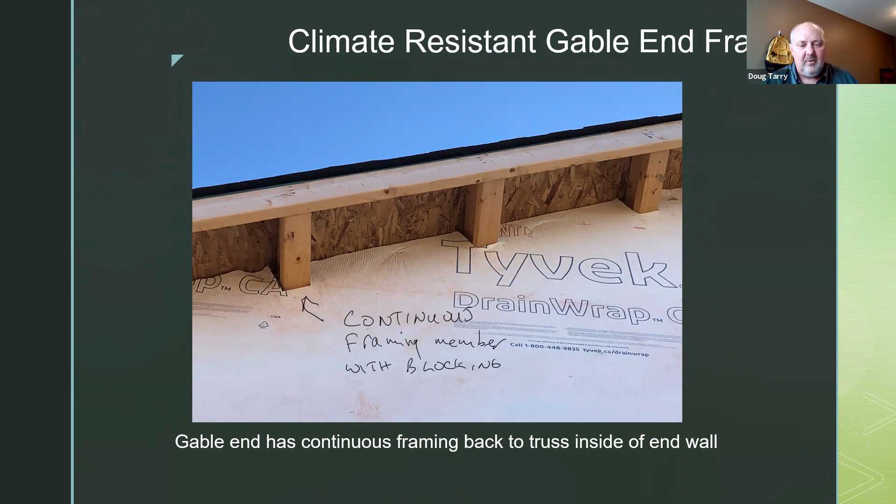No way. So here we've got the gable end now has continuous framing back to the truss in the inside, and it's attached to the end wall. This is about 10 times stronger than that previous detailing. It's a little bit more time to do, but it's far stronger. So this is really where the variation in cost can happen on a roof. You know, it could be only $400 if all you're doing is adjusting your plywood a bit or your sheathing a bit and adding the screws. But if you've got to get into multiple gables, you can add a bit more money pretty quickly, right?

And then because we like to share, here's a detail for folks done up by our engineering firm. It might not be accepted by your building officials down there. You might need to get it engineered, but it'll give you an idea of what to do. So it's looking at doing what we call an outrigger from the previous truss out over top of the wall assembly on the gable wall. And that's basically a scab to hold extra support on the piece that's going out to be on your gable front, right? And it is just significantly stronger because it's tying everything back in twice.

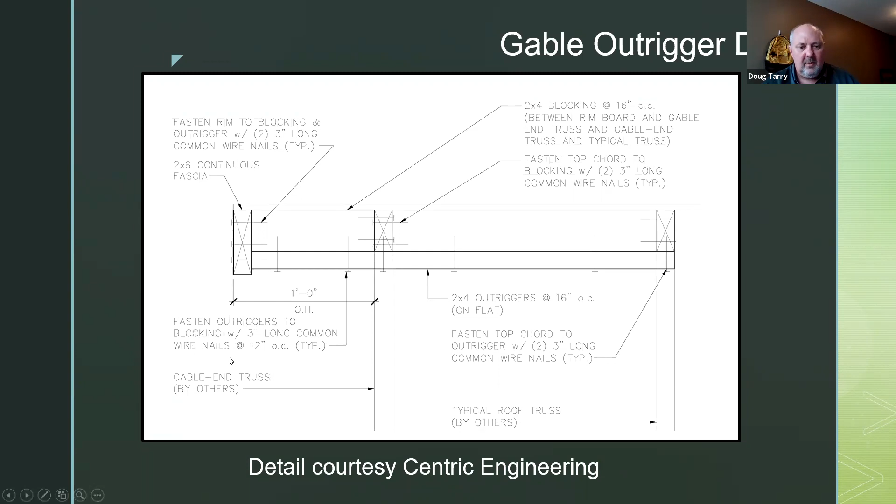It's not just a toenail onto the front fascia of the gable. It's actually connected to the gable roof and then connected to the truss behind, right? And then very importantly is that when it's connected to the truss behind, there is a nail that's on the underside going up into the underside of the truss to connect it and fasten it there. And that works really, really quite well from a loading performance standpoint.

Oh boy, we're up onto another commercial break here. So, great. Poll questions. We're doing not too bad for time. We're almost through everything. But I guess the poll question here is, are you having some of the problems, extreme climate events such as high wind and seeing any framing failures, flooding, forest fires, etc.? And I think I'm still seeing the original poll on there. Yeah, just for the audience, if you scroll down to question number 4, you should be able to answer that question. We have a couple of folks that have pre-answered, and we're getting 33% on high wind events, 33% on rising insurance costs, although I assume that would be 100%. And then 67% on other. And if you could put in the chat section what your others might be.

Yeah. So here's why it's important, and this is actually why I'm very concerned about fire. In my work with the insurance industry and with the home building industry at the national level, we're apprised of what's called a reinsurer. So there's the insurance guys, and then there's these big multinationals. Some of them are from Europe, and they do the reinsure work on the insurance packages. And the concern is that they've come and said, look, Fort McMurray, which was a huge fire, it wiped out the town pretty much. That can't happen again. And our representative says, well, we hope it doesn't happen again. And we're hoping the climate, it's going to be okay.

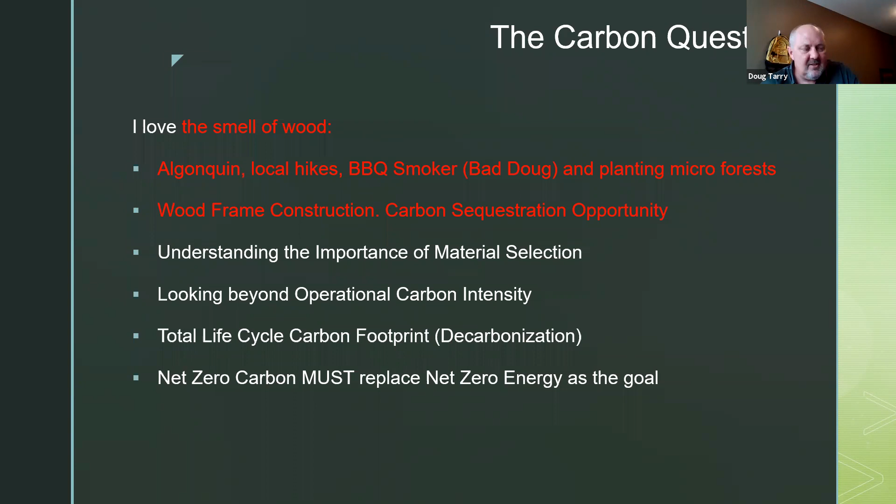So we look at what's called the total life cycle footprint, or decarbonization. It's a fairly new field, it's evolving, and we're heavily involved. It's great to see that EEBA is coming to the table to be a partner in this. But I really believe that net zero carbon has to replace net zero energy as the goal, and we've got to start wrapping our heads around why that's important and how to do it.

So again, really simple: if you're looking at how to do this, it's biogenic materials to create a carbon sink or carbon storage. Now, Chris Magwood is going to be speaking at the conference. I don't know if he's going to be live or just doing a video call. Chris is one of the experts in there, we're working with him. He's at the Endeavour Centre up in Peterborough, Ontario. Really cool guy, doing some really amazing research, and they're working on a carbon calculator, which I'm going to show briefly today.

So you're looking at the carbon drawdown, which is the removal of atmospheric carbon, and then you've got carbon emissions, what's created by manufacture, transportation, that sort of thing. And then the difference between the two is the opportunity for carbon storage. So that's really what we're exploring now.

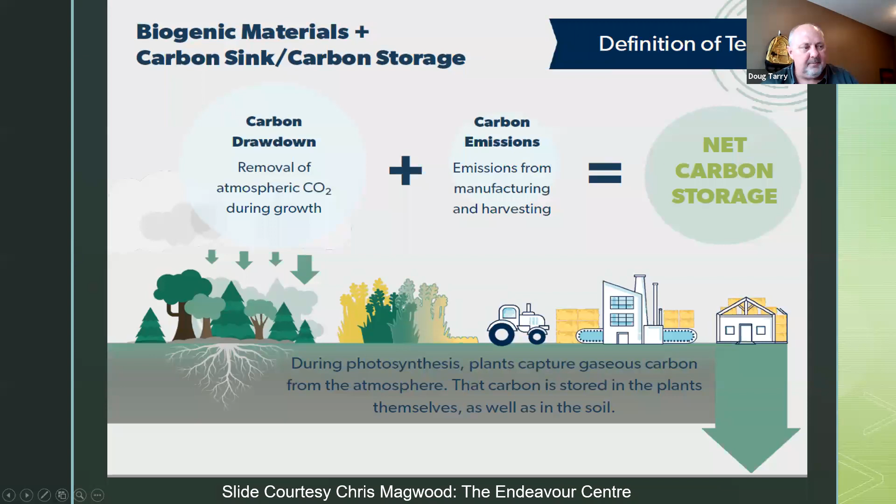So here's the concern: if you don't deal with upfront embodied carbon, you can add more insulation that's got a higher carbon footprint to get to a net zero home, and you can actually increase your carbon footprint in the home. Here's an example.

So on deck 3, which is two weeks from now, we're going to come back and look at some research that we're doing as we finish up with looking at the selections we've made within the home. We're going to look at some carbon calculator information. So I think that'll be pretty cool for folks.

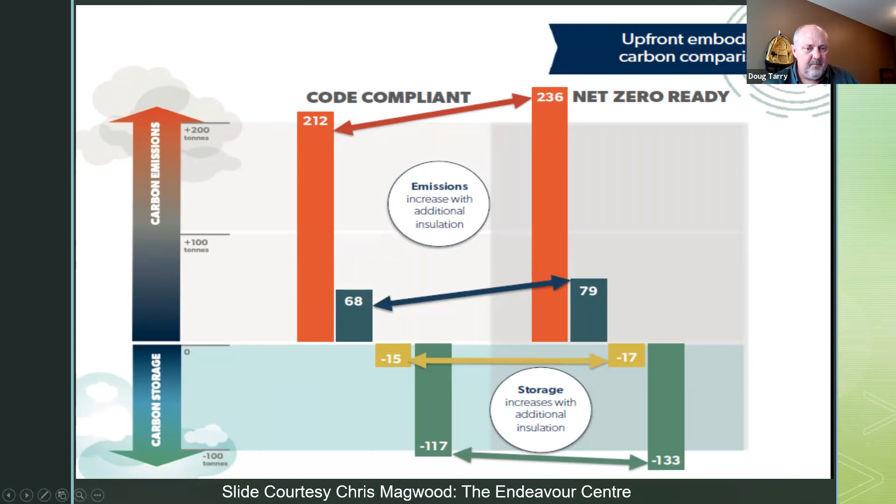Where we are right now as a company, we're probably slightly higher than the typical UEC, but we're trying to get into the teal range. Our goal is within 24 months to get ourselves down into the conventional UEC. On the buildings we're building though, we think our buildings might already be coming in on the best conventional UEC.

That might be a bridge too far for production builders, but if we could get all production builders building into the yellow, that's a carbon sequestration situation, which would be pretty incredible. So our goal is to get somewhere between green and yellow within the next 24 months, and then ultimately move into the yellow zone.

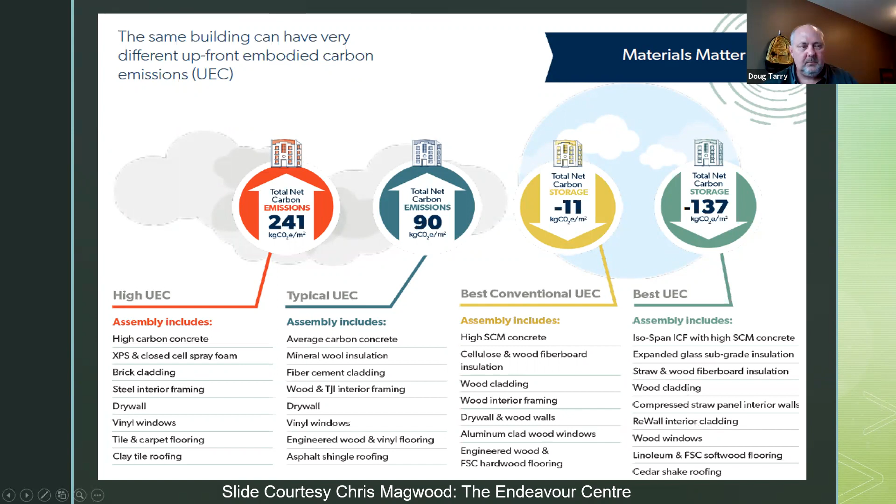So I would say check out Chris's webinar if he's doing it by webinar, or if he's live, go see him. Really cool guy to talk to.

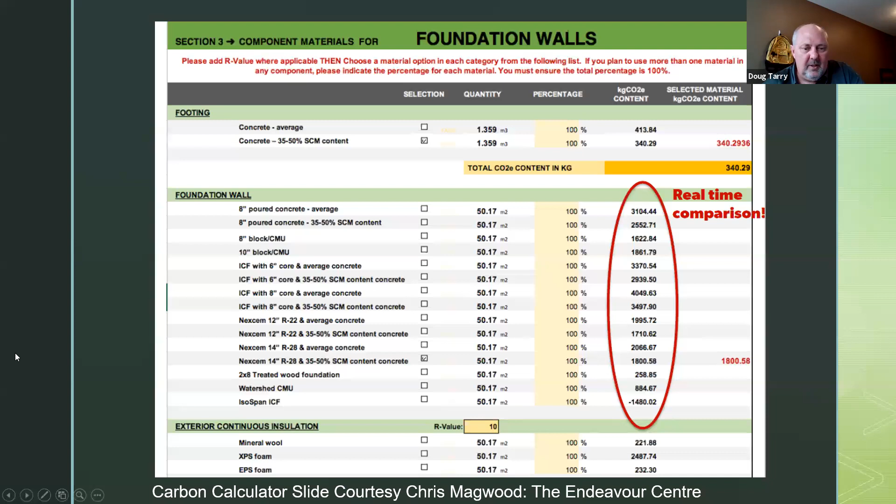So that's kind of what we've been working on, Aaron—the 4 principles. And what we want to ask now is, are any stakeholders on the call seeing anybody asking about carbon reduction strategies? Great, Nancy, if you could put the poll up.

If you go to number 5, that's the question we have. We have a couple pre-answers: municipalities and regulators at 33%, and others at 67%. So I'd be interested if you can chat who your others are. That would be great. Clients 0%, and right now investors 0%.

And I would guess, Doug, that's kind of a function of if you're a public builder or a private builder at this point. Yeah, I think public builders that have investors in it that trade on the stock exchange are probably a lot more exposed to that than the smaller builders. Absolutely. We are seeing municipalities declaring climate emergencies all over the place.

And unfortunately, sometimes the solutions they're coming up with might not be ones that we would consider the right answer. As an example, and Chris can tell you more about this, the lowly plastic bag, the whipping post of climate resilience in the marketplace, has been replaced by all these canvas or cotton bags, and the carbon footprint of those bags is so big that you can probably make 100 of the plastic bags for what you're getting out of the other ones.

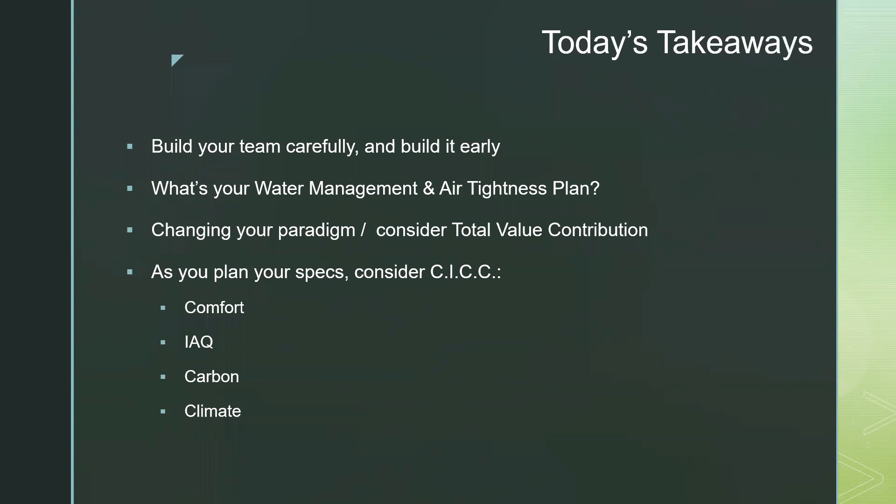And that gives me back to what I call CICC, which is look at comfort, indoor air quality, carbon reduction, and climate resiliency. If we can consider those 4 principles and then what I call the 2 fundamentals, you're going to build a home that can last 100 years, which is what we really should be looking at. Because code will get you to 45 or 50 years, and that's it.